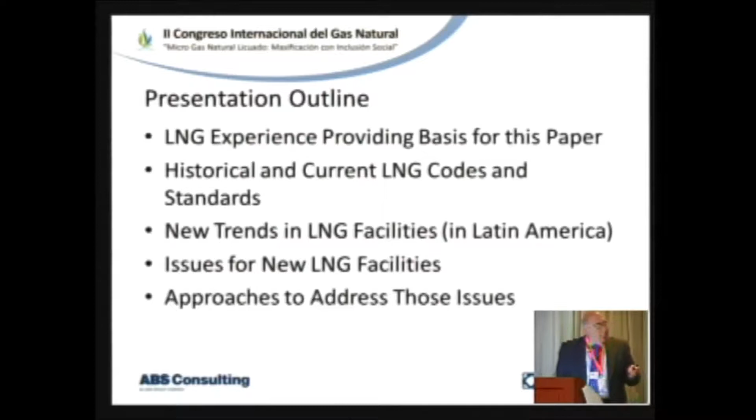There we go. You saw this slide yesterday in Mario's presentation, and my only point is that right down here is where my business is. It's safety, risk, integrity management services. We basically help people satisfy regulations, operate facilities safely. It's a good thing when my clients don't have an explosion, don't have a fire. People are safe and they go home the next day. That's what we're looking for.

If you look at the work that I've done in LNG and the company has done in LNG over the years, a lot of work for the U.S. Coast Guard, the maritime regulator. I'll talk about the regulatory landscape in the U.S., and it's different down here. But we've done a lot of work for the U.S. Coast Guard. One of the things the Coast Guard requires a developer to do is a waterway suitability assessment. Is this location for a terminal appropriate in terms of bringing an LNG carrier in, because historically they were import facilities. You were bringing a carrier in full of LNG. It had to share the waterway with other users. It had to safely navigate and had to be able to be docked at a facility to unload. Then after unloading, it had to go back out.

For some ports, that's quite easy. There's a short approach from the ocean to the pier, the jetty that you're going to unload. In other cases, it may be 15 or 20 miles up a river. So a suitability assessment has a safety and a security assessment in it. It talks about the impact on the port.

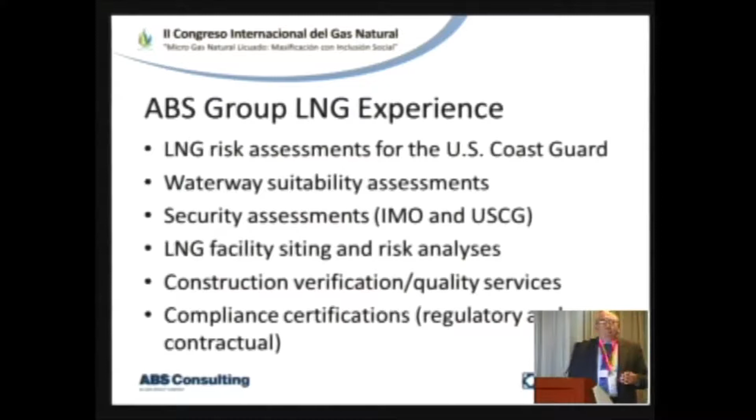Once facilities are being built, our folks will do construction verification, quality services, those type things, and compliance certifications, that someone's meeting a regulation or meeting some other contractual requirement. Okay. When I talk historical, my focus here is primarily in the U.S., and I'm not going to address the Japanese standards, and the Japanese have huge amounts of LNG experience, obviously. I am going to talk to some extent about the European norm and some of the standards coming out of there, because they really offer some advantages over maybe the U.S.

standards. In the U.S., you have to have an approval by the Federal Energy Regulatory Commission. They're the people that license an LNG facility that's going to import or export. They're an independent agency. They do that under the Department of Transportation regulations, because import and export facilities of any size at all are going to connect to pipelines, and pipelines are DOT regulated. So there are U.S. codes of federal regulations from the Coast Guard and from DOT that are specific to LNG.

Okay? When I got started in Latin America, that wasn't the case. Increasingly, that is the case, that there are some specific national regulations. And that helps when they're good ones. And when I say good ones, I don't like some of what's in the American regulations either, okay? There's also requirements to file environmental impact reports, EIRs or EISs, environmental impact statements. And there are Coast Guard or Navy maritime rules in terms of what you have to do before you can bring LNG into a port.

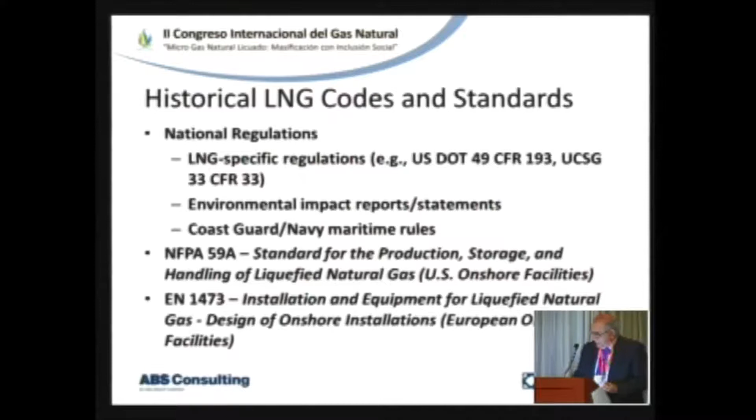So if I go to a slide here on 59A, issued in 67, the current version is 2013, which means if you started a facility 2 years ago, they probably referenced the version before 2013, there was a 2009 version, I believe. But if you look in the US regulations, the regulations refer to the 1996 version, so you have to ask, what do I need to meet? So you've got to get the right standard, you've got to understand it. And it's not necessarily a simple thing.

I printed this double-sided. I'm not going to read it to you. It's 2 columns, about 80 pages, and it's complex. It really is. You read this and it references another part and you have to go read that and come back and read the first part. It's a consensus standard. It's written by a committee, okay? And you know what they say about committees: a camel is a horse that was designed by a committee. That's sometimes what you get.

It's what I would call a specification standard. It tells you what to do. You shall make your tanks in accordance with this standard. You shall do this, okay? It's a traditional US type regulation as opposed to being performance-based, telling you what you have to accomplish but not how you have to do it.

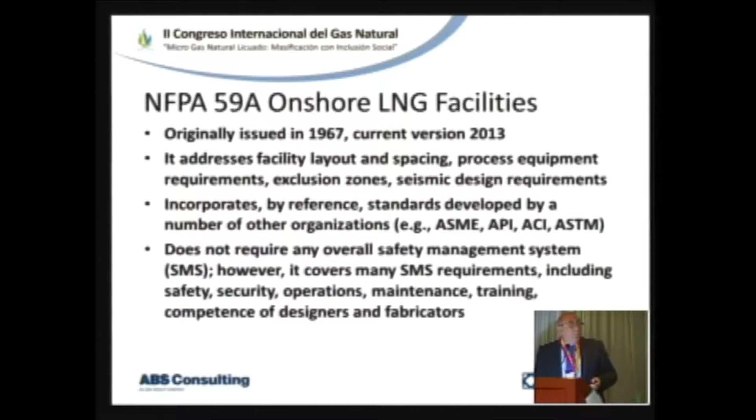The most famous thing in 59A is that it requires exclusion zones, okay? Exclusion zones look at certain scenarios and say, if this happens and LNG is released, there are limits on how far a flammable concentration or 50% of the flammable concentration reaches. There's a requirement that if there's a fire involving an impounding area, if you spill LNG, you have to have an area where it gets collected. A fire over an impoundment area can't expose occupied locations to greater than a certain radiant heat flux, okay? So they're not really risk, they're only consequence standards. You have to meet that or your site is not acceptable, okay?

And over the years, people have said, those are really pretty arbitrary standards. Like one of the requirements is, I've gone out and I've built full containment tanks. I've got metal tanks inside a pre-stressed concrete tank with a pre-stressed concrete roof. And there's a requirement in the standard that you assume there's a tank fire and that the tank is burning from the top. I don't know what happened to the roof. Nobody ever told me what happened to the roof, but it's gone, okay? And so you assume now this tank is burning from the top, and the requirement is it doesn't cause too high a temperature on other tanks. So this tank fire doesn't cause that tank to fail.

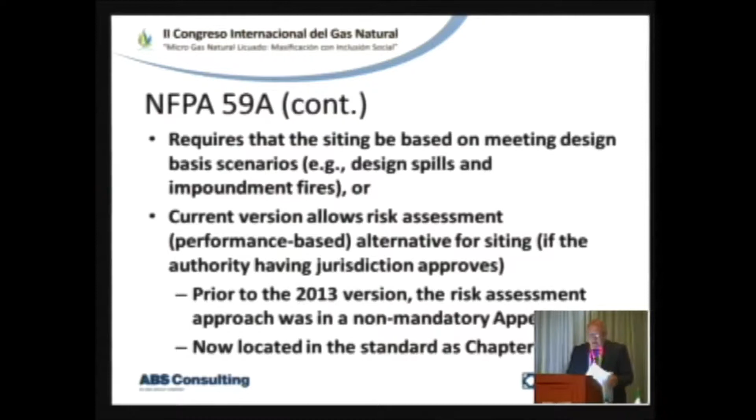So my experience was within NFPA 59A, and in working here in Latin America with the Petrobras series of FSRUs, I'll show you later, I didn't really see 1473 that much. But when we worked in Chile on the Mejillones terminal, Tractebel Suez was the architect, engineering, constructor, and obviously they have huge experience with the European norm, okay?

The hazard assessment can be either quantitative or qualitative. They call it probabilistic, and their words are different, but to me it's a quantitative or a qualitative approach. Okay, and so now we've moved to a standard that's 130 pages long. Again, very complex, not really as hard to use as the US standard, but still there's a lot of familiarity you have to have, a lot of experience. A lot of times you need to look up and make sure you're doing the proper thing. So there's another one.

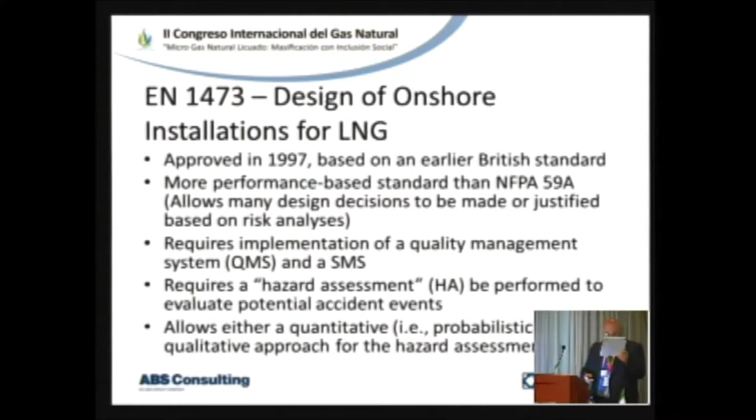On the qualitative side, you can do hazard and operability analysis, failure modes and effects analysis, event trees, and fault trees as you get into the quantitative aspects. All right? And there are lots of places that have produced guidelines for these types of standards. The Center for Chemical Process Safety is one of the places that you can get really good descriptions of how these kind of techniques are used. All right?

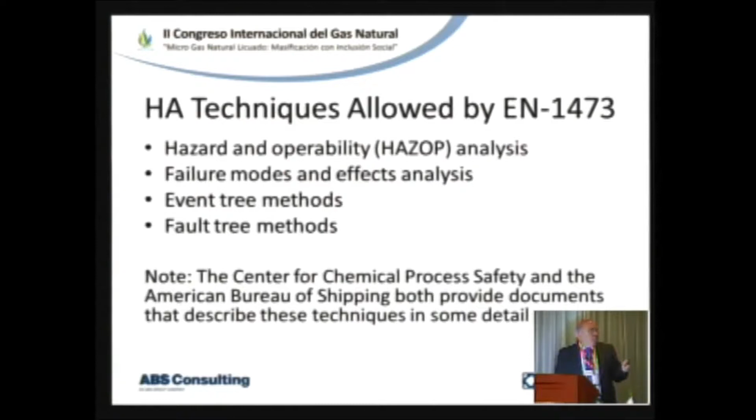On the next page I'll show you some of it. SIGTTO is the Society of International Gas Tanker and Terminal Operators, okay? So it's the industry getting together and saying, hey, if we don't do this safely, we're going to get run out of business. We have a huge stake in not having LNG accidents. LNG in some parts of the world, like much of the United States, has a very terrible reputation as being high risk, although we have 50 years of experience saying it's really not a very high risk industry when you do it well. And the SIGTTO recommendations are people saying, we don't want you in the business if you're not going to do it this well, okay? And this ISO standard looks a lot like their recommendations.

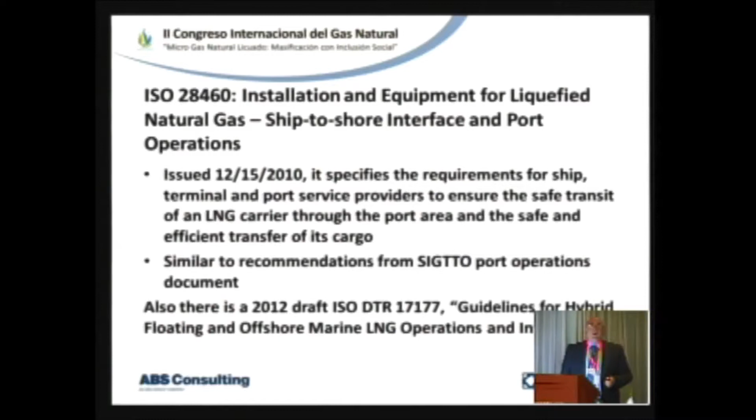Just for your information, if you go and look at the SIGTTO website, again, very valuable documents. In doing consulting, one of the things I do is get familiar with these and help other people get familiar with them. Because you'll hear in a minute, the engineers know how to engineer, the operators know how to operate, but a lot of developing an LNG terminal is educating people. It's educating the new regulator, okay?

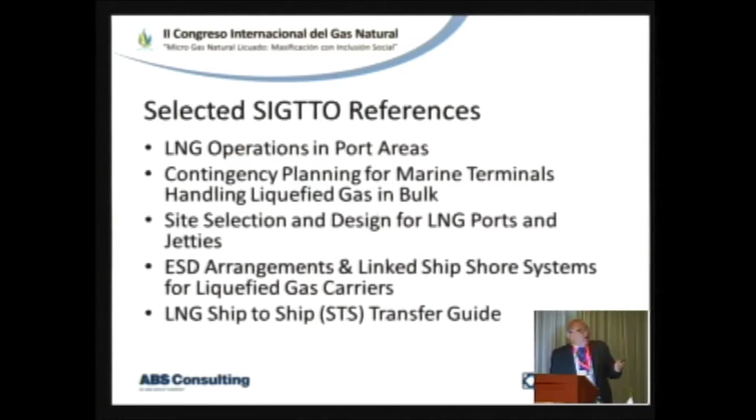It's educating the new mayor of the town, the governor of the state, the fire department, the fishermen, all those kind of things. And standards like this that people can pick up and read and say, oh, that's how they do it. And that's how they've done it for 50 years. These help tremendously.

Okay, so I've talked about a number of facilities. With Petrobras, we've worked on all three of the FSRUs: in the north, in Pecém, then in Guanabara Bay, and in Bahia, All Saints Bay. All right. Again, these were needed in a hurry. There were changes in gas distribution in South America. They were worried about dry seasons, and so these were not necessarily going to be operating 100% of the time, but they wanted them very quickly, and they did that by doing floating storage and regasification units.

An FSRU is basically, these were mostly conversions of LNG tankers, where they've taken an LNG tanker and put the regasification on the deck. Okay, you then moor that someplace. At Pecém, it's moored in a cargo terminal at a berth by itself, and the carrier comes in across the dock from that, and you transfer from the carrier to the FSRU. The carrier goes away, the FSRU has its own storage, and it can vaporize into the natural gas pipeline.

In Guanabara Bay, they built a jetty out in the middle of the bay. You come in, you wave at the great beaches, you come up past downtown, and you go under the Niterói Bridge, and you're up in the upper reaches of the Guanabara Bay, and there's a dock where the FSRU is sitting, and the LNG carrier parks again across the dock from it, unloads, and then it leaves. Bahia I'm not as familiar with. I worked on it slightly, but I haven't visited it.

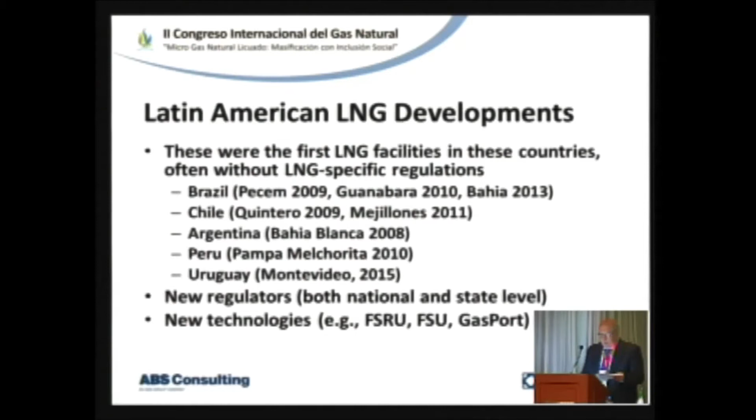So we had the issues of limited regulatory experience. There was no long-term, here's how we've always approved those kinds of facilities. There was a tendency on the regulators' part to say, well, there's a good American standard and there's a good European standard, use them both. Well, sometimes they conflict, okay? They do things differently. Both of those are for onshore terminals. They don't really fit the FSRU.

So if NFPA 59A is imposed on my floating facility, I have to go through it and say, okay, yes, sir, we're going to use 59A, and it has 400 requirements, and 312 of them are appropriate for floating facilities, and you've got to get them to agree to that. You want them to agree to that in writing, in your license, because you don't want the person who's there now to retire and the new person says, oh, there's another 42 things you need to comply with. So the licensing and the documentation was very important.

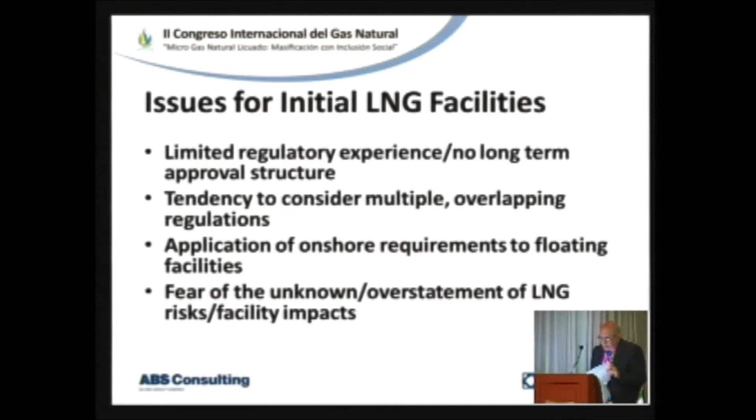And there's the fear of the unknown. I have a couple of issues that people, I better wait for another slide or two. I look down at my slide and it says, don't talk about these issues here. You have more slides, Myron.

Wait till later. Okay? So to address limited regulations, define your approach, make your commitments clear. That was an important part of getting those projects. Educating people about what applies; if exact regulatory and consensus standards don't apply, use the guidelines where you can. All right?

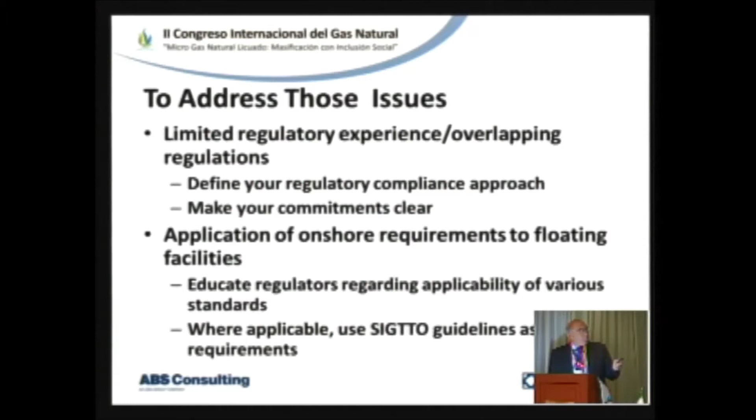Fear of the unknown and overstatement of the LNG risks. If people are overstating LNG risks, it doesn't help if the industry understates them. Because if you understate the risk, people just don't trust you. Here's an example that I've fought for years. Are you familiar with gasoline? Gasoline is a liquid, okay? Does anybody want to say gasoline doesn't burn? Gasoline burns, right? I can go to the internet right now and find lots of reputable organizations and people that have written that LNG does not burn. Well, we import it to the country to burn it, right?

What they're saying is at minus 160 degrees, as a liquid, LNG doesn't burn. But that's not what people are concerned about. They're concerned about if I spill it out of this container onto the floor, it's going to start vaporizing. Very near the puddle, it's going to be too rich to burn. But someplace between there and the back of the room, it will go through the flammable range. And if it ignites then, you're going to have a fire. It's not the end of the world. It's probably going to be a slow fire. It's going to burn back, and then you're going to have a little pool fire, or a great big pool fire, okay?

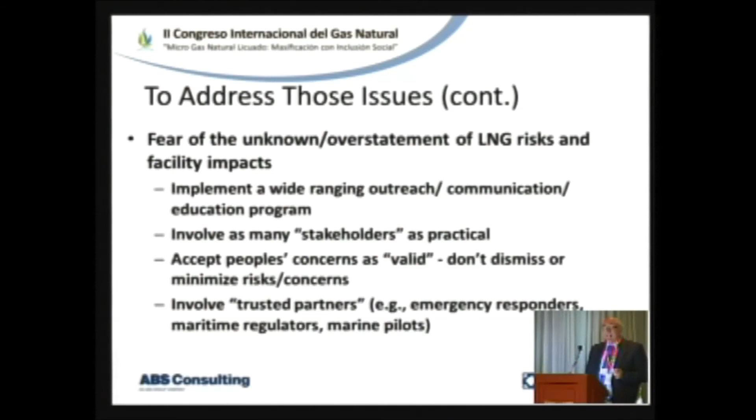And what the plant manager told me and what I have seen is adults behave so much better when children are present. They may have concerns, they may not like what we're doing, but the level of shouting, the level of objection, it drops down because adults don't want to be seen as behaving badly when there are kids there. So I've done that now in some meetings, and so far it works for me as well.

So I guess what I'm saying is there are a lot of challenges in bringing LNG into new territories, using the codes and standards, using the 50 years of experience, the guidelines, and reaching out to stakeholders. In doing this, I never realized I was going to be talking to the fishermen, the city council, the state planning commission. All these kinds of people are all stakeholders in what you're trying to do, and talking to them and listening to them and addressing their concerns serves your purposes. So, thank you very much.